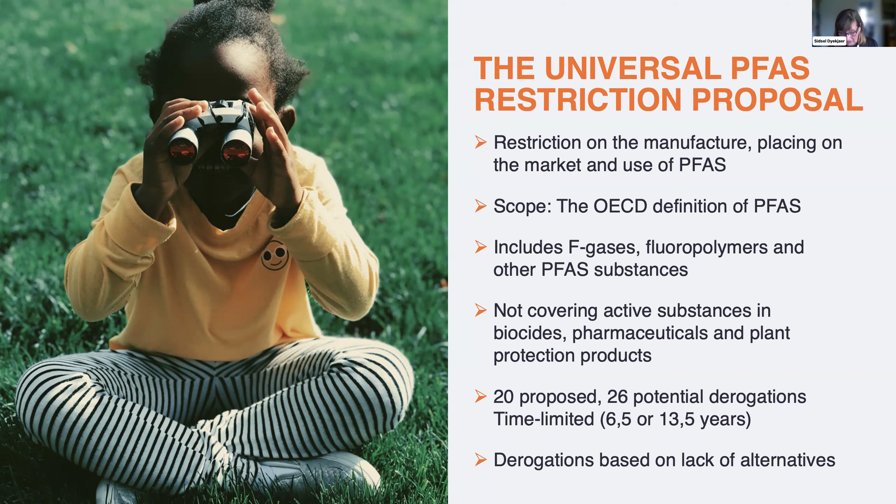In the proposal, there are several derogations proposed: 20 proposed derogations and 26 potential derogations. The potential derogations are for those uses where the authorities thought they would need more information from industry to justify that there were no alternatives available. Basically, this proposal covers all sectors, and all the derogations in the restriction proposal are based on whether there are alternatives available or not. So next slide, please.

I tried to put up a tentative timeline for how the proposal from the 5 member states could be handled according to the procedures we have in the REACH restriction. If you start from left to right, you can see that the proposal was sent to the European Chemicals Agency, ECHA, in the beginning of 2023, and there was a public consultation on the proposal from March to September—a consultation that many of you know about, and maybe you have also provided answers to.

While the consultation was running, the ECHA committees, the Risk Assessment Committee and the Socio-Economic Committee (SEAC), started to develop their opinion on the proposal. They are still working on that, while the member states that submitted the proposal are working on a revised proposal based on what came in from the public consultation. They meet 4 times a year. Next meeting, end of November, they will discuss, for example, construction products.

They have also said that F-gases will be one of the next sectors to be discussed, so F-gases might be discussed already at the meeting in March. Continuing the work, going through all the sectors, at some point, maybe end of 2025, the Risk Assessment Committee will have their final opinion on the proposal, and SEAC will have a draft opinion. That will then go out for consultation for 60 days, and based on that, SEAC will develop their final opinion.

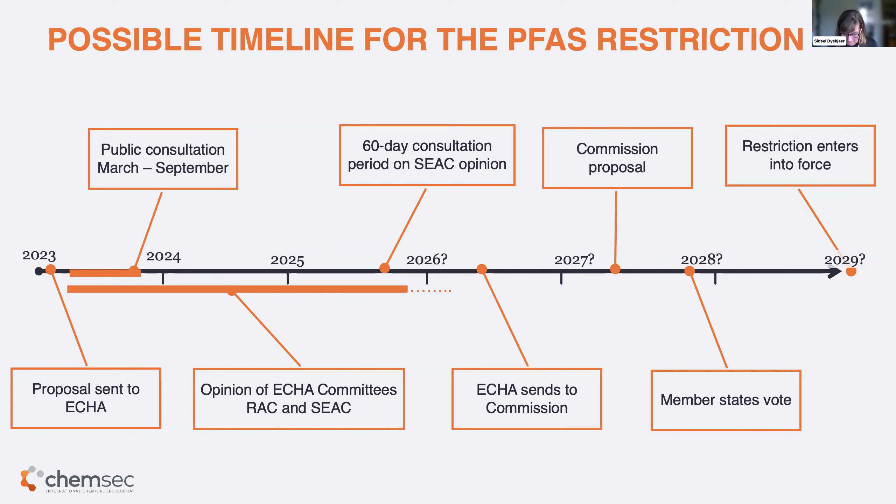Just a few words about the problems related to F-gases. Many of you probably know that originally F-gases were mostly a climate issue and an ozone layer issue - we had the Montreal Protocol, and the Kigali Amendment included there. The recent F-gas regulation is all based on concern for the climate. But what happened was that many of those F-gases with a high global warming potential were substituted with so-called HFOs, which have a low global warming potential, but unfortunately they form TFA. Now we find increasing levels of TFA in surface water, groundwater, and drinking water - widespread contamination and increasing levels. We also have more and more scientific evidence that these substances are problematic: they are very persistent, very mobile, have reproductive effects, and accumulate in plants and so on. That is why we really need to move away from these substances and switch to natural refrigerants.

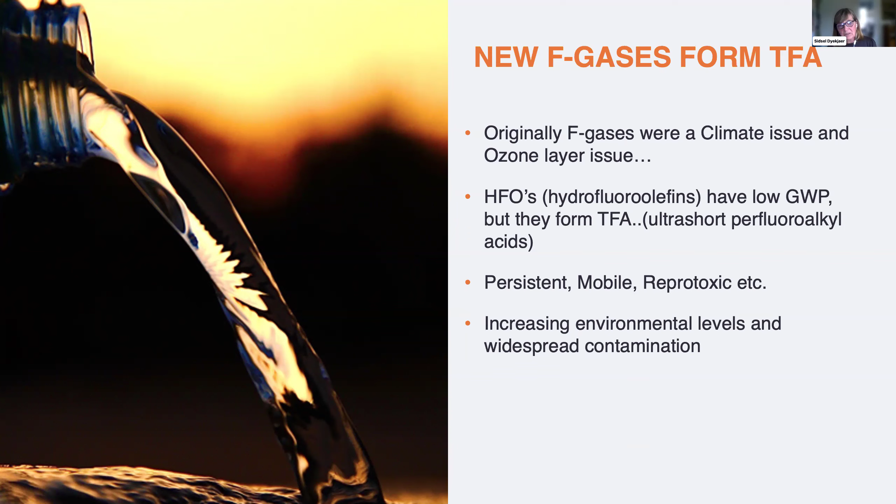These are just my final points. I participated in a big event about mobile air conditioning in Berlin in September, and learned some key points about the issues we have around PFAS and mobile air conditioning. I learned that there are definitely two refrigerants that are possible alternatives: CO2 and propane. But it's also important to say that CO2 seems much more advanced than propane. I also learned that it's easier to switch to natural refrigerants in electric vehicles than in combustion engines - I don't know why, but there may be some technical problems.

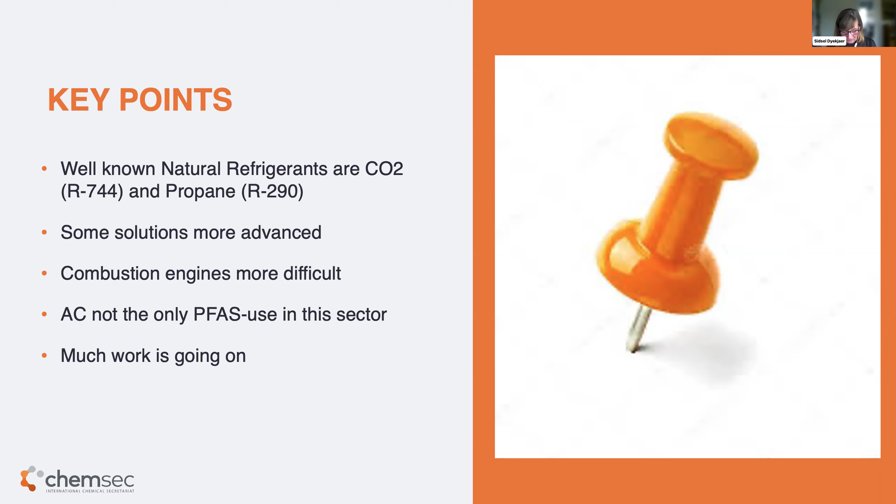Also important to say that aircon is not the only use of PFAS in the car industry. You will also find other PFAS uses in that sector, maybe in different components like O-rings, surface treatment, and refrigeration during transport, and so on. But the focus of this webinar is the aircon. Most importantly, I found that much work is going on to find alternatives to F-gases in mobile air conditioning, and that's why I'm really excited to hear the next speakers, to hear how they have handled this issue. So looking forward to that, and thank you from my side.

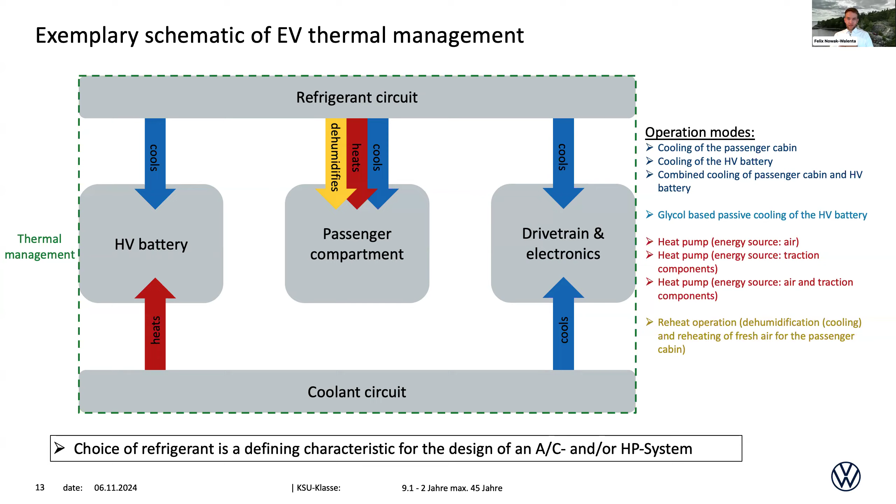Next slide, please. And that's why you need to choose wisely. And we chose R744, as has been said before. So what's our motivation to go this way? Because at least for heat pump systems in a car and a mobile application, that has never been done before. So we chose R744 because of its environmental compatibility. It's a very good refrigerant in that regard.

As you can see, I think you can read that faster, or maybe you already know all these facts, but it's not a PFAS, it doesn't form TFA, doesn't have a global warming potential basically, and doesn't really have an ozone depletion potential. And on the other hand, R744 is a very good heat pump refrigerant. So you can use it to very low temperatures and you can still collect heat from the outside air, and you can help your battery electric vehicle especially to gain some range in comparison to traditional systems that can't go below -15, -20 degrees, which CO2 can.

Of course, where there's benefits, there's also challenges, right? Its physical properties make it so that you need a very high operation pressure with CO2 systems, so R744 systems, and also high operating temperatures. That's just the physical items we have to deal with that come with R744, and those force you to choose the materials respectively. You need to choose materials that can withstand the pressures and the temperatures, of course. And with CO2 being a tiny molecule under a lot of pressure, leakage is also a challenge that you have to overcome. So you also need to choose your materials wisely so that the leakage rate is okay, so that you can keep the refrigerant in your refrigerant circuit. Next slide, please.

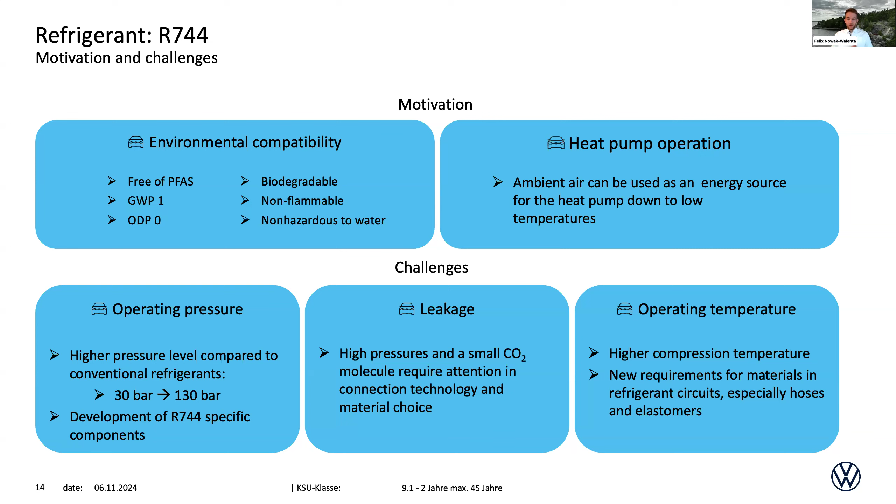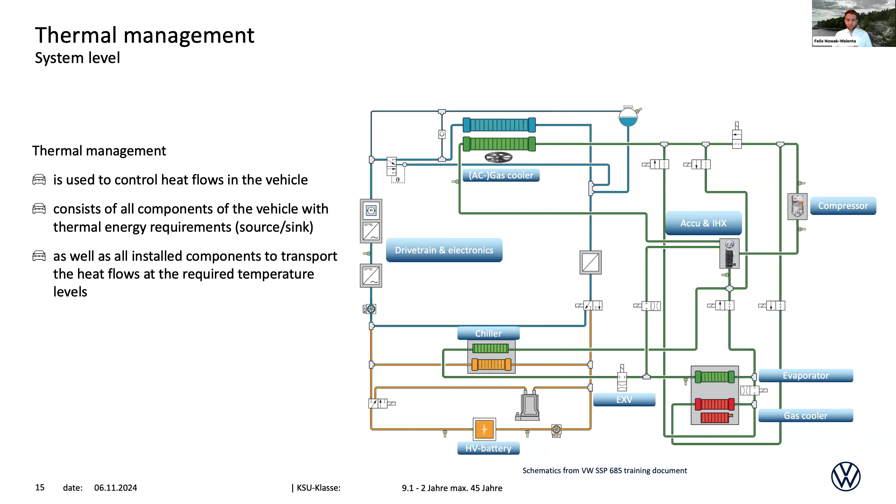Yeah, so we can jump 1 slide further, please.

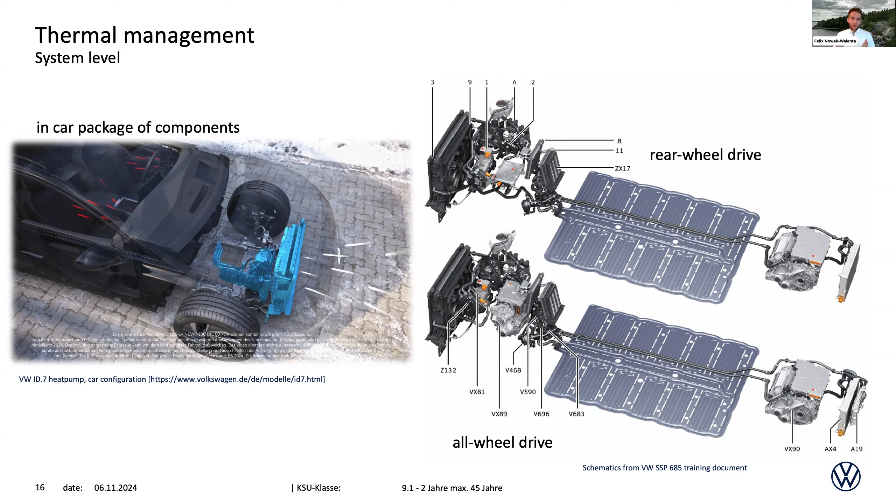One of the misconceptions when you talk about R744, as I've said, is the challenge of high pressure. People think, oh, you need massive refrigerant lines, you need a lot of metal. For 130 bars, which is the highest pressure that R744 systems run at, compared to approximately 30 bars for R1234YF systems, that's 100 bars more. So people think you need a lot of metal to keep that system intact.

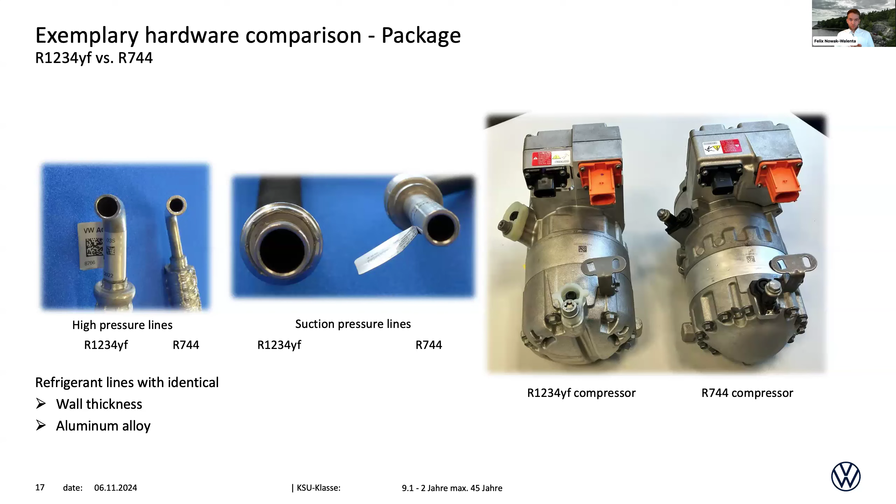So coming to an end, we have a lot of very experienced, very good international suppliers. They are the backbone of every OEM, a good supplier. So we know the knowledge is out there in the market. Many companies know how to work with R744, how to design R744 systems. This design know-how is really widespread in the automotive supplier base. And we know of very many market-ready designs that have been presented to us, because of course suppliers approach us and show us their new ideas, designs that we were not able to bring into market, to bring into fruition.

But that we know that are there, and that's just what we can communicate. We can highly encourage everyone to check that out because there's really a lot of good ideas out there in the market. Thank you so much for listening.

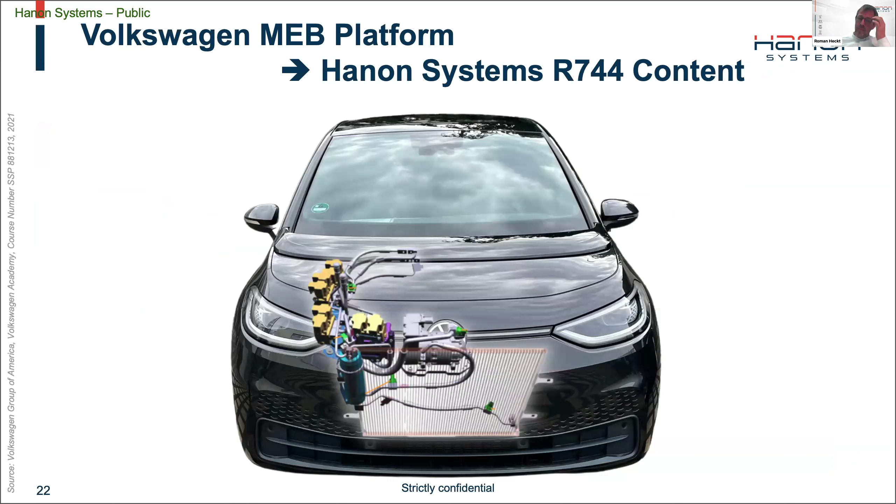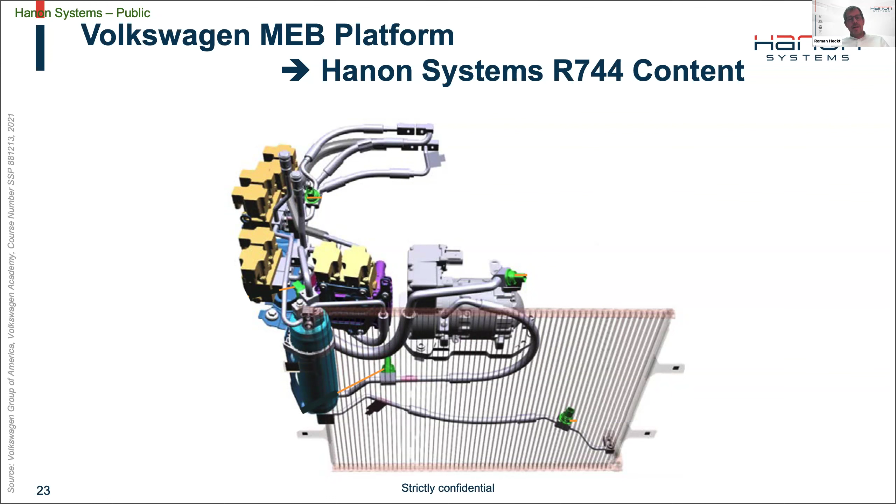Next slide, please. To start with a picture, one of these nice vehicles of VW now here shown with an R744 system, which of course is inside of this small engine compartment. I would like now to jump on the next slide to share with you the details of the Hanon Systems R744 content, which we brought into production in 2019.

And if we now jump on the next slide, please, we would like to start to explain you more about the compressor. Felix already explained that the compressor looks similar to a YF compressor. So from the outside, only some experts can see what is the difference between the R744 and the YF. From the package, there is no big difference. The R744 is getting even a little bit smaller because of the small displacement. The high suction pressure, which we have for CO2, helps us to have even higher density.

So with this, a smaller compressor - in this case, for example, we are talking about a 5 cc compressor, which has the same performance as the 33 cc compressor of a YF version. So that means we have a much smaller displacement. We are also using scroll technology here in this compressor for the special challenges of the high pressure.

In the absolute number, if we talk about, for example, a relevant full performance AC condition, we are talking about 35 bar on the suction side and 125 bar on the discharge side. So that means we have something on the order of 90 bar pressure difference between in and out. This, of course, takes also some special efforts in internal leakage or sealing inside the scroll.

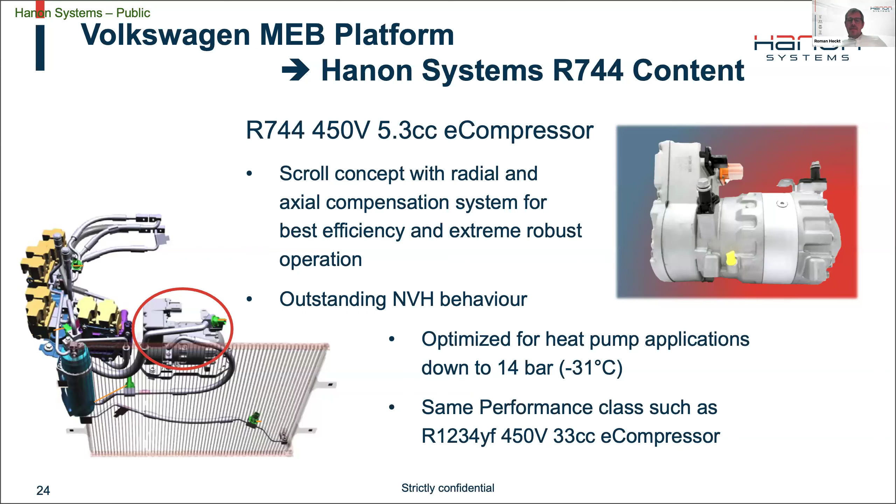Please take the next slide. Second component, so after the compressor - of course, for a heat pump system it is very relevant to have valves inside the system. And we saw from Felix before the schematic where we had already some idea that to get all the functional modes realized, certain valves were needed. This expansion and shutoff valve technology is developed by Hanon Systems.

It is a bidirectional expansion or shutoff function. In this double block housing, we have always 2 valves inside. The valves are capable of being fully opened.

We spend special efforts on external but also internal leakages to avoid efficiency reduction because of any bypass, which we don't want to have. There is an internal self-calibration for the actuator to the valve so that we always have a position feedback inside the valve, which makes it very robust in the application.

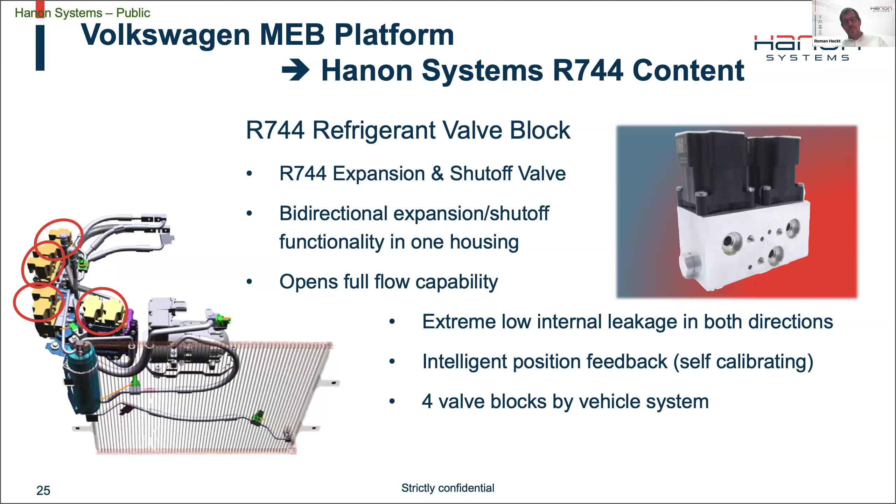Next slide please. An additional component, which is probably new if we talk about AC systems in the vehicle. It is not really new because in the past, the mobile air conditioning world was very familiar with accumulator systems. And later on with the TXVs, we changed over to the high pressure

accu or refrigerant storage systems. Now back with CO2, we are preferring to jump on accumulator systems so that we have a low pressure refrigerant storage, and have the system integrated in this accumulator also the internal heat exchanger, which is for CO2 helpful for high ambient temperatures to get performance and efficiency in place.

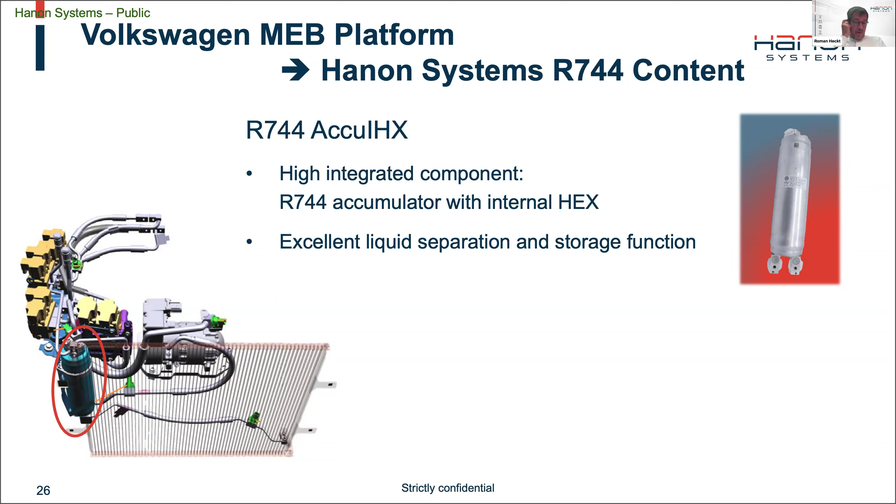And with this component having this integrated in the accumulator, this won't cause extra lines and no extra efforts in the engine or in the vehicle assembly process. This accumulator has an excellent liquid separation and storage function included.

Also the gas cooler in the front, so it is a direct system which is applied here, direct system to the ambient. The gas cooler is a 3-path design with thermal barriers inside with an effective thickness of 12 millimeters. It is directly in the front of the vehicle and can be used as a gas cooler in the AC mode, as an evaporator in the heat pump mode.

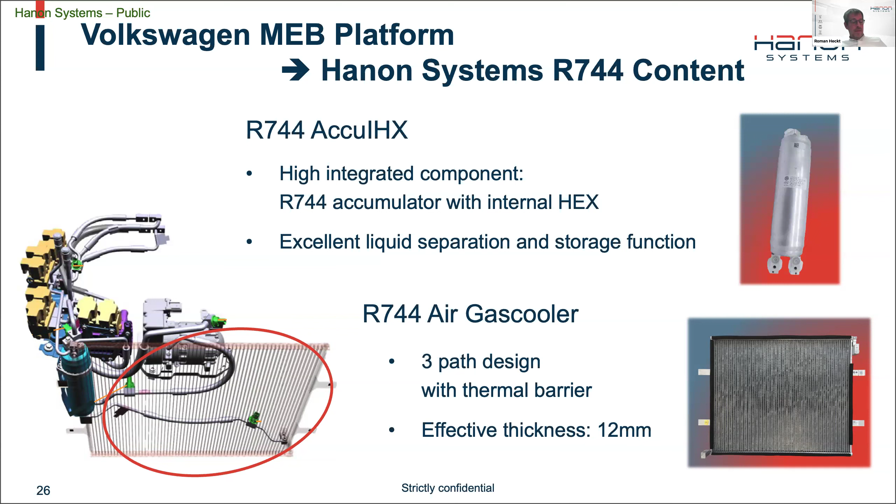Beside all the Hanon Systems components inside this R744 vehicle, Felix already mentioned there are also other suppliers involved. You see here there are more components, especially in the HVAC and also the line routings, which is relevant. So there are also other suppliers involved in this, not only Hanon Systems.

And in addition, as was mentioned before, we see that the global supply base for R744 systems for mobile air conditioning systems is now growing very fast. So there's a big interest on the supplier area to be prepared for R744. It seems there is an understood market for this.

Just to give you an idea, we named this slide that there is a large field experience. So it is much more than a field - we are running now, in the meantime, more than 700,000 vehicles.

Of all these 12 vehicles Felix presented in the first slide, this is real market experience for this AC and heat pump system since 2020. And it's running very well, very robust, without any critical failures in these last years. So from this, a real good field experience with R744.

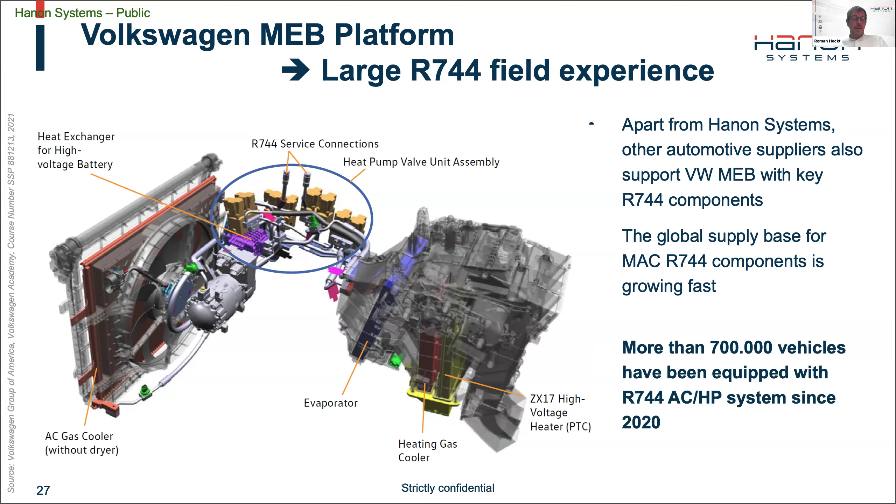Summarizing from our point, we see that PFAS-free AC systems for electrical vehicles, including heat pump function, are already in the market. They are realized with R744. And as mentioned, the global supplier competition is growing.

This is always good for our technology if there are more than a few suppliers getting into this, so that it's not just good for our customers on the cost side. I would also say, as an engineer, it's good that we have more heads thinking about optimization and improving the situation.

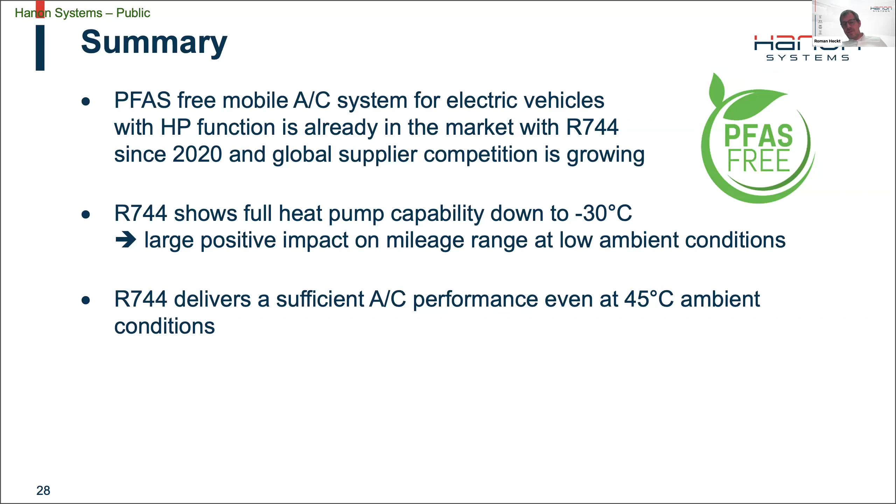What we see is the R744 system shows very full heat pump capabilities down to minus 30 degrees C, with all this positive impact on the mileage range at these low temperatures. And on the other hand, we also see that R744 delivers sufficient AC performance even at 45-degree ambient conditions.

So that means, we see that R744 is an all-rounder refrigerant for mobile AC systems, and we don't see any reasons to continue with chemical refrigerants inside these electrical vehicles.